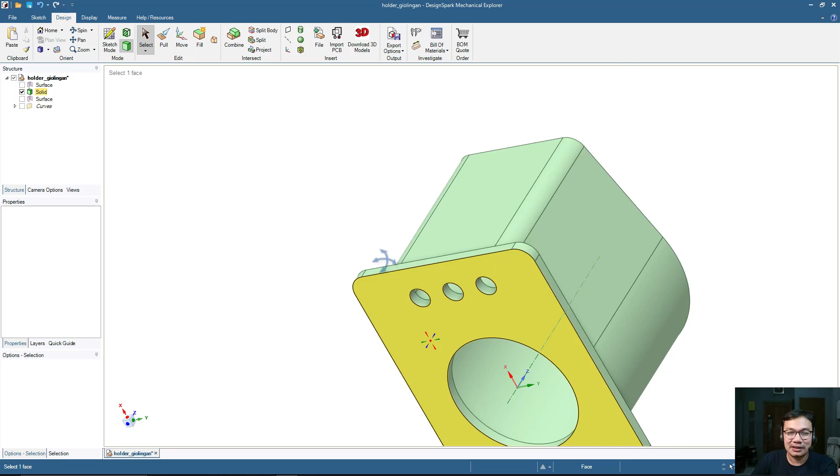On the screen now is the design on DesignSpark Mechanical. It looks like this - it has these walls, and this round one is for the grinder, and this one is for the handle. It has holes on the base so that coffee ground or dust won't get stuck on the holder; it will easily fall off.

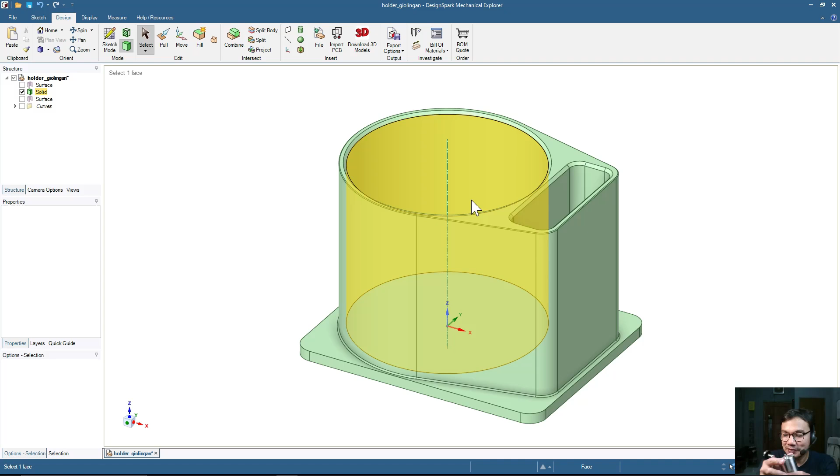Now let me show you how to design this one. It will be based on my grinder, but if you have something with a different size, you can adjust by yourself. Let me start by File, New, Design.

Let's start with the cylinder for the holder of the main part of the grinder. For this one, the diameter is 48 millimeters. Let me start by making a circle here.

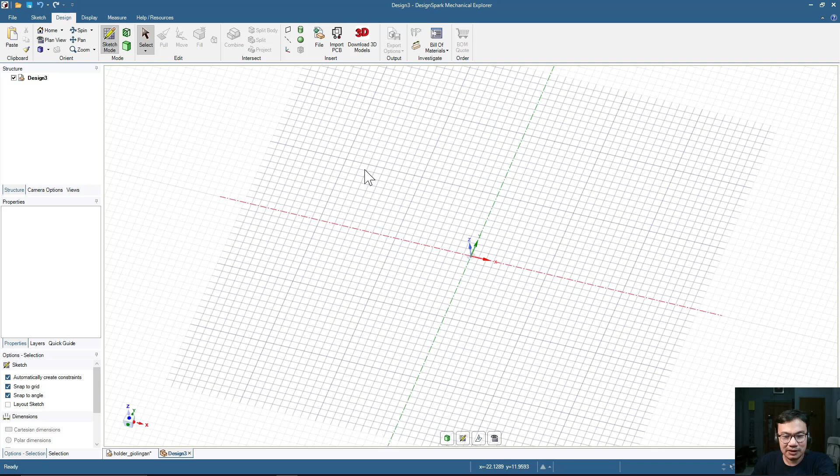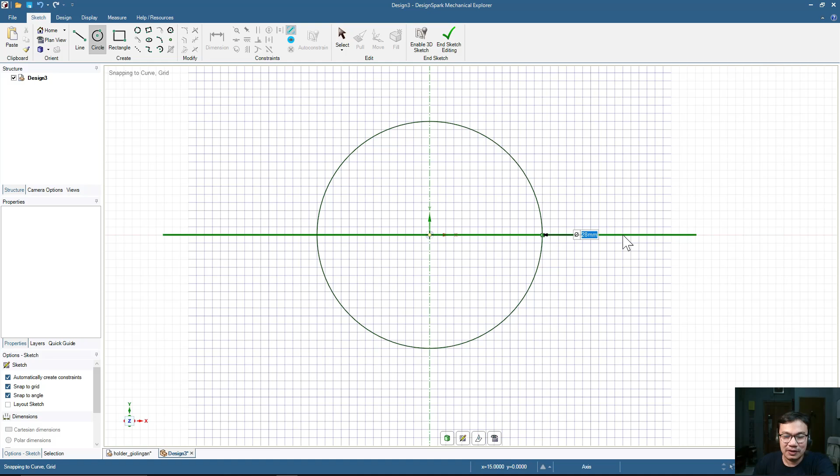I press V on the keyboard to get this top view. I'm scrolling with my mouse to zoom in and out. Sketch, now circle - let me click at the center and move to get 48 millimeters. I type in 48 and press enter, so now we have this circle with a 48 millimeter diameter.

I click the right button on my mouse to move the view, but maybe some computers have different settings for the button position, so what I say here may not be exactly the same on your computer.

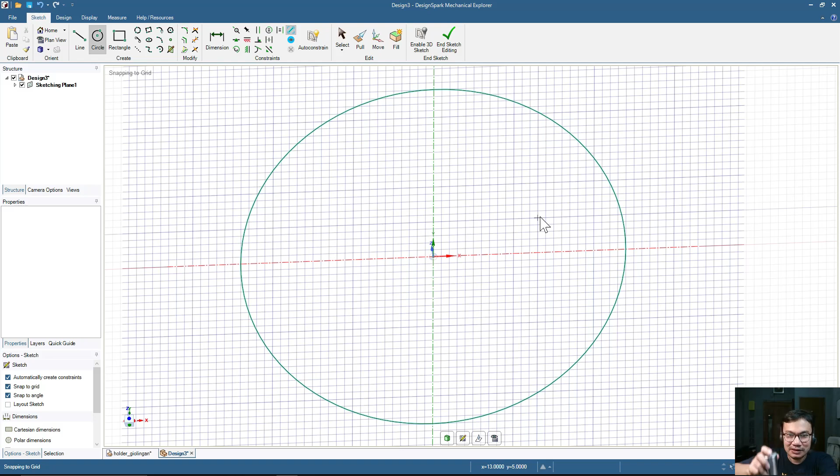This is similar to the diameter of the grinder, but we need to give some space on the left and right so it will easily enter the holder or stand. So let me give 3 millimeters as the space.

To do that, we click the offset curve, then click this circle and move out by 3 millimeters. I type in 3 and press enter.

Next, let me also add a wall, using the same offset curve tool. I click here and type in 2 millimeters so we have thickness for the wall.

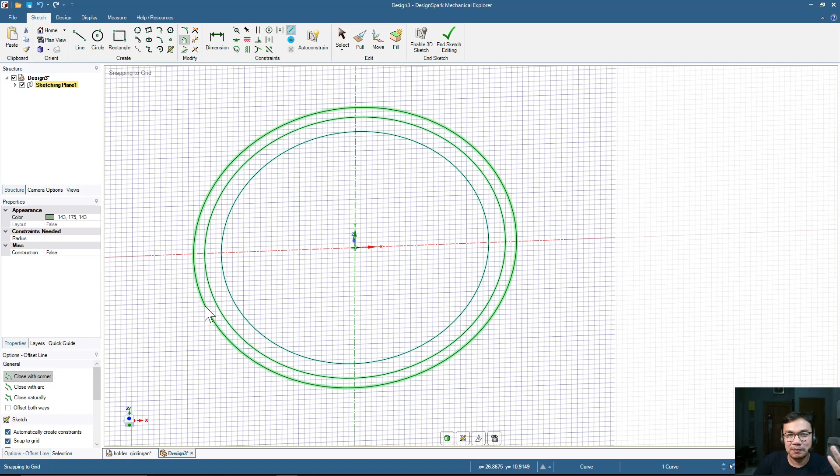Now we will make a shape for the holder, this one. The dimension for this one is 36 millimeters wide and 12 millimeters thick.

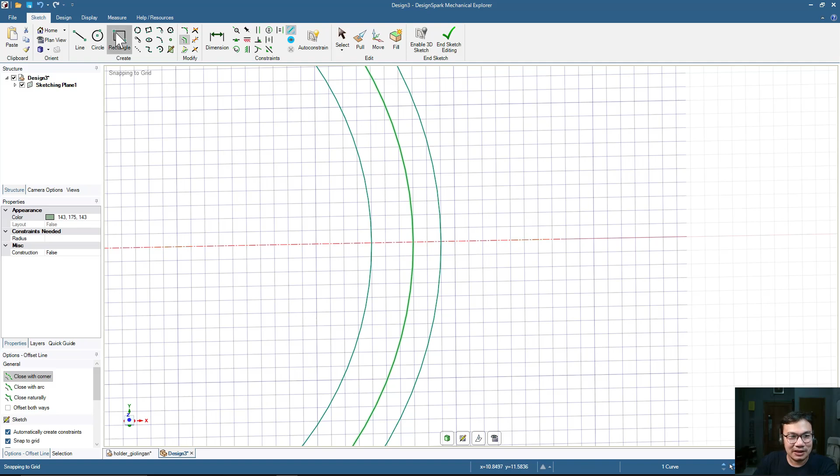So it's going to start right here. Let's say I want to give 2 millimeter space from this circle - 1, 2 from this one. Let me click the rectangle, and from this one I will make a rectangle, 36 by 12.

Meaning now I will make something 18 by 12 - this one, 12 for the wide, and then I press tab on my keyboard and type in 18. Now we have half of the shape that I need.

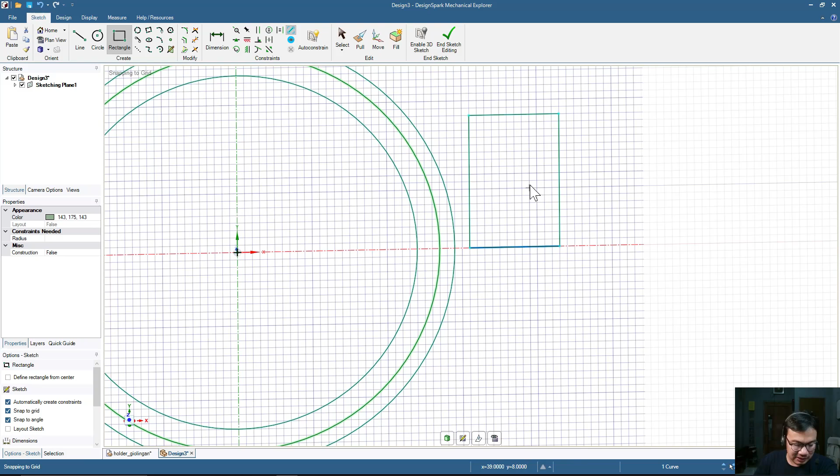And then again another rectangle here, 12 by 18. Now we have this shape - this is going to be the position for the holder.

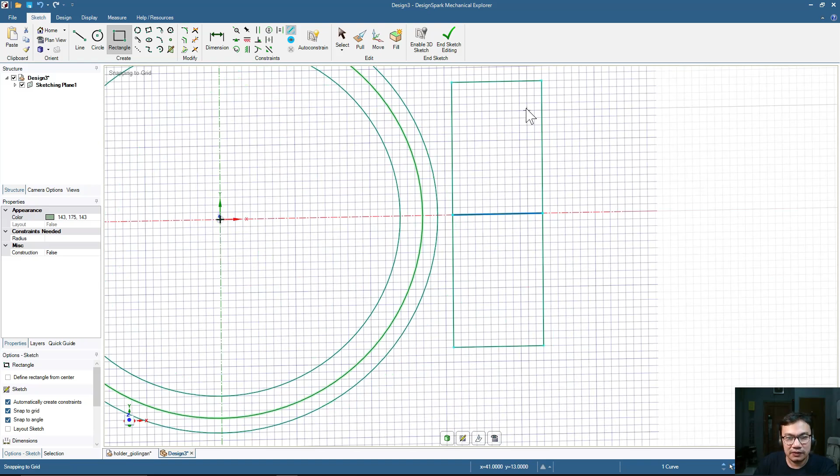Now let me continue by making a wall for the place, the holder for the coffee grinder handle. To do that, I'm using the offset curve again - oh sorry, it was stuck with the rectangle, so I press the escape button.

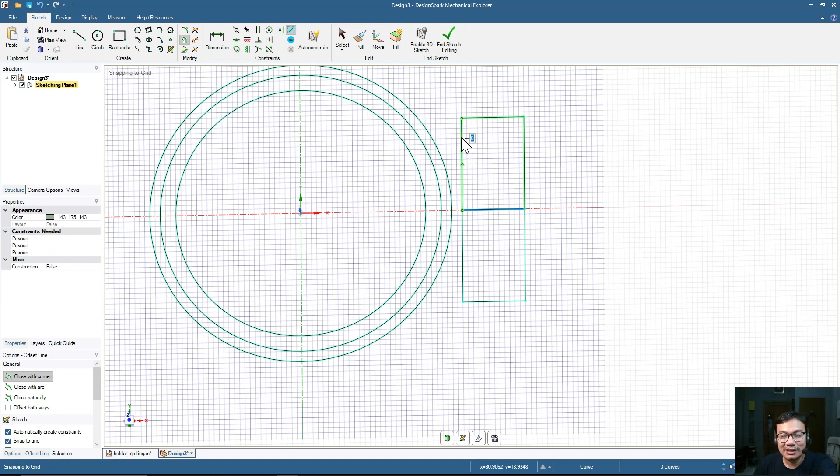Now let me click this rectangle, double click, and move outward, then input 2 millimeters to become the thickness of the wall. For the other rectangle, also the same thing - double click and move by 2 millimeters. Done - this is the basic shape that we need.

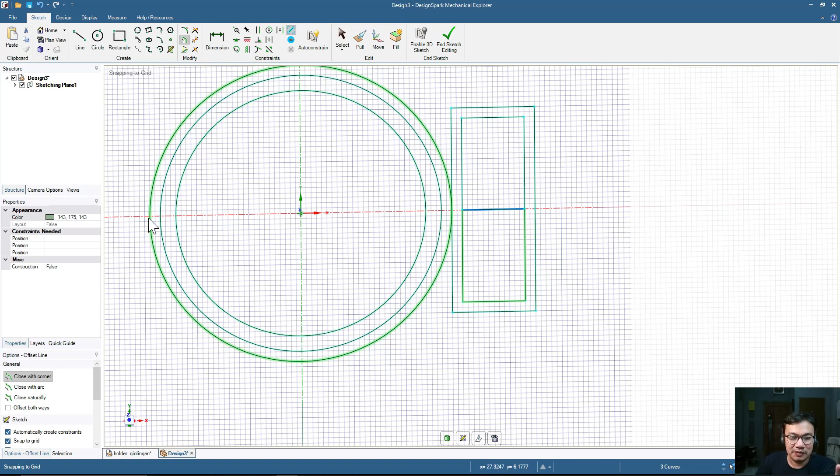Now let's connect the outer line for this one and this one for the main part. There are several methods, but I'm going to use connecting the circle - just follow me step by step. Maybe you have a different method, it's okay.

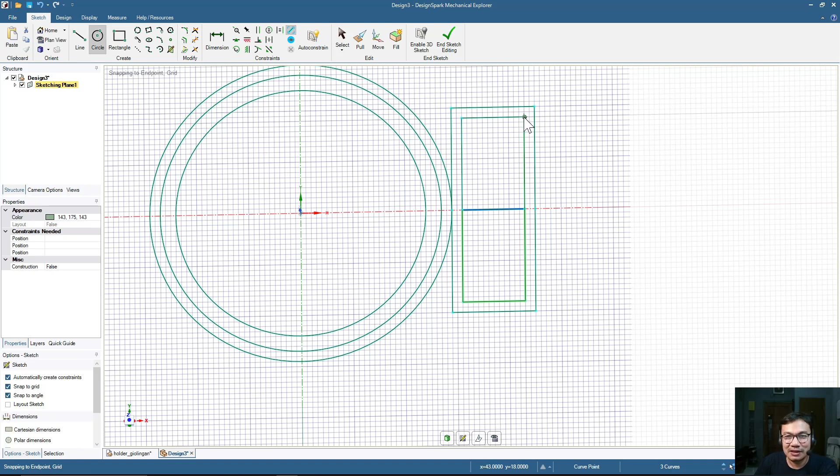I'm using the circle here, clicking from the corner of this one, and moving outside, so I will have this circle here. Then also the same thing here, making a circle with 4mm diameter.

Now we will make a line connecting this bigger circle to these small circles, using the tangent line tool. Let's start with this one at the bottom.

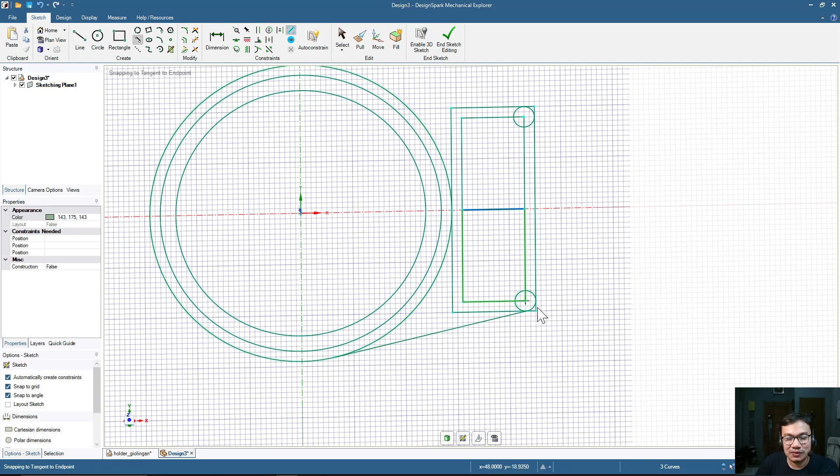So click here and then click on this small circle, and it will connect these two circles. Same thing also for this one - click this one here and this one right here. And we get this shape now.

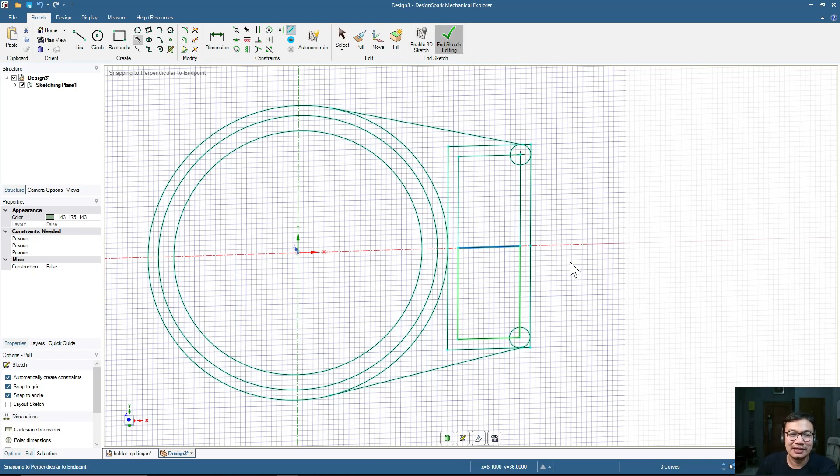To finalize the basic design, let's click this one, end sketch editing, and we can start pulling or extruding the shape. Now let me start by extruding this one, the main part of the holder.

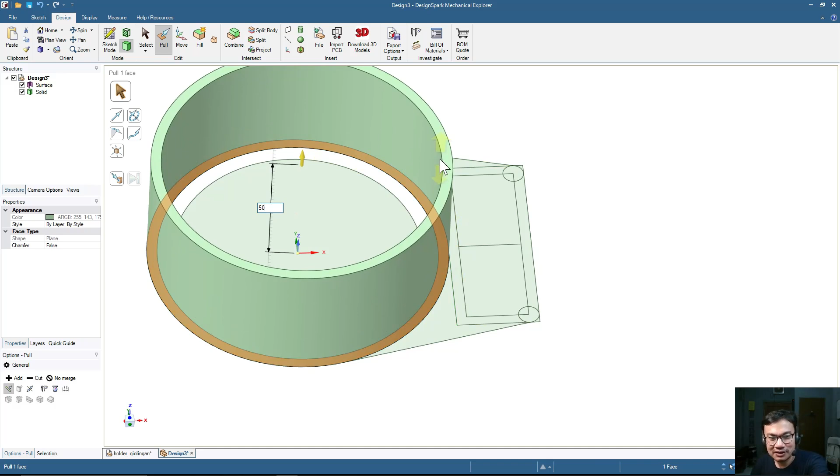And yes, from this I click this surface and move up to extrude by 50mm. Like this. Next is the shape that will be the holder for the handle. So I click here, press Ctrl on my keyboard, and also click this one and this one. Then we can pull and type in 50, or use this one, up to.

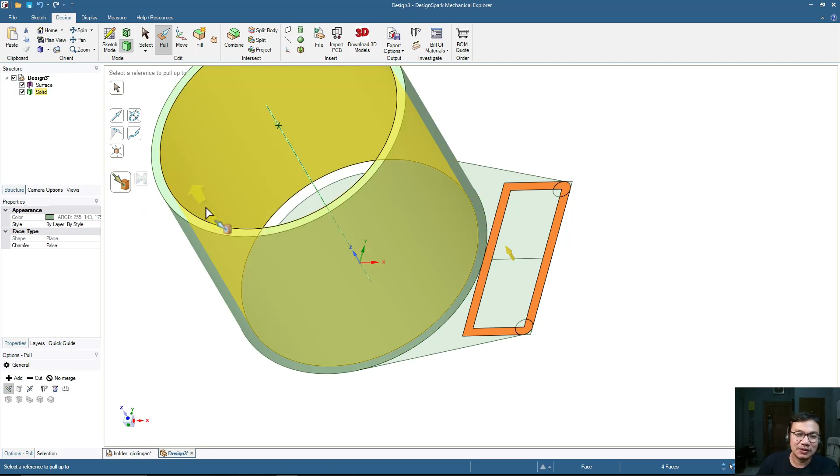Or you can press the U button on your keyboard, it's much faster. Then click here on the surface that you want, let's say the target surface. So I click here, and yes, it will pull or extrude to the same position.

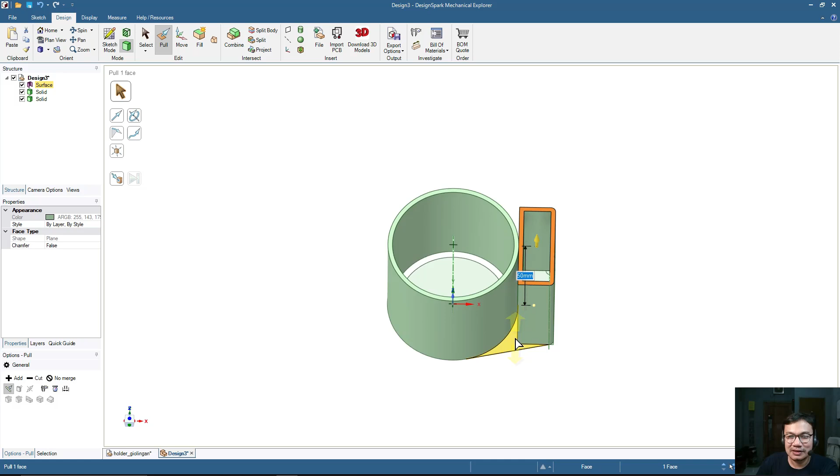Now I will also add some thickness here. So I'm selecting this one, press U on my keyboard, and then click here. Same thing here, click here, press U button, and then click here. And yes, we have this basic shape done.

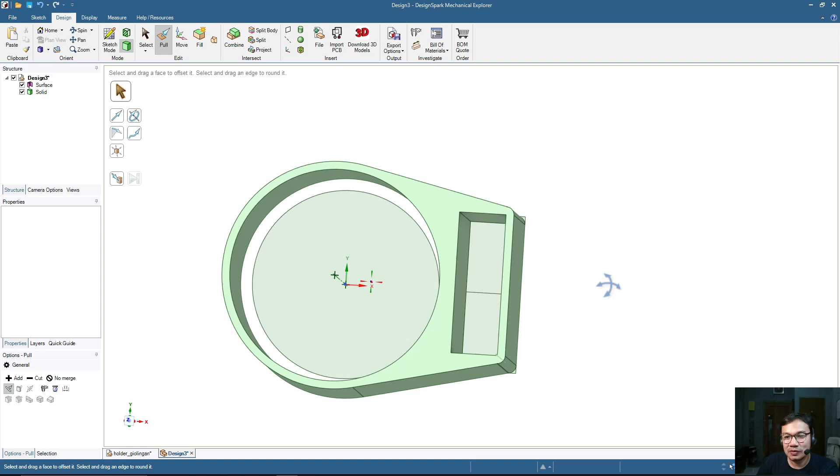Now to make the design better or smoother, I will add radius here. So this one, let's say 2mm. Also the same thing for the other corners. Press home at the menu, and yes, this is how it looks like.

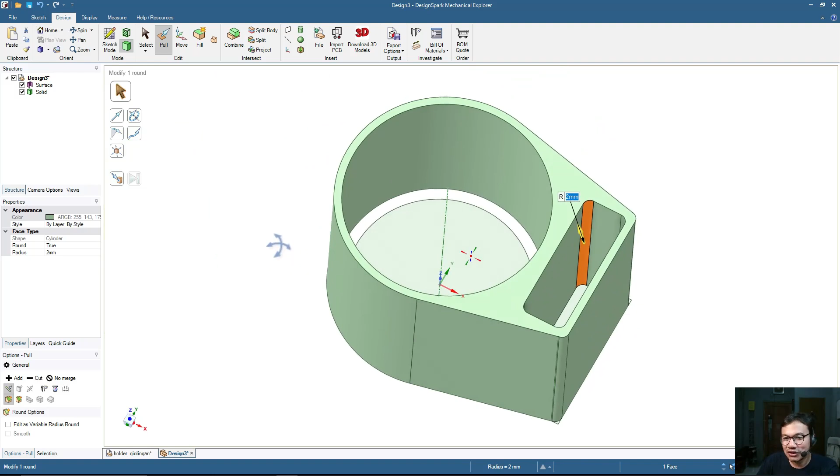Almost finished. Next, let's add the base. To do that I click at this lower surface and then sketch mode, then press V on my keyboard. So we have this bottom view, and we can add any shape we want, but in this case I will add a rectangle here from this position, and this is 3mm from this one.

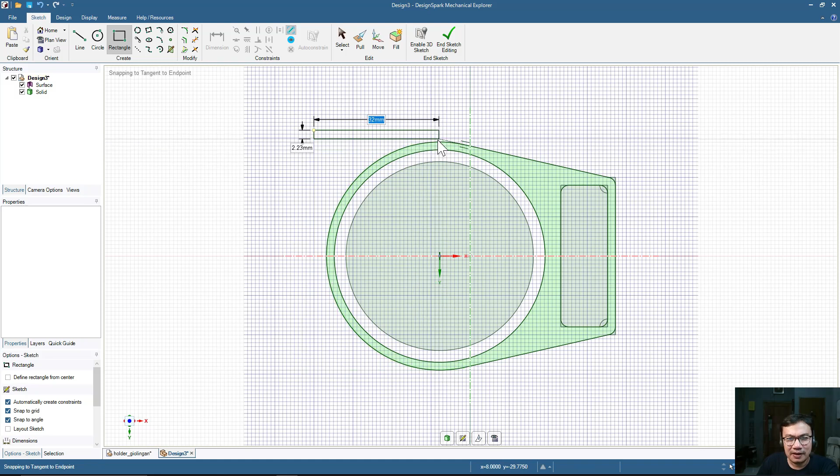Meaning that I can add another 3mm from this one. Like this, so 64. Like this. And then press this one, end sketch editing.

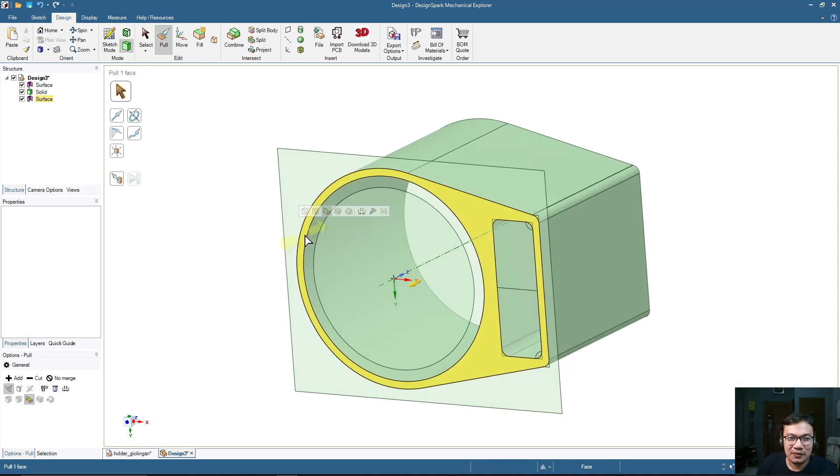Now we can add some thickness for the base, let's say 3mm. So I press Ctrl on my keyboard and click all these surfaces, then pull or extrude by 3mm. Okay, and then click home.

Sorry, my kid is calling, so wait a moment, my kid is calling.

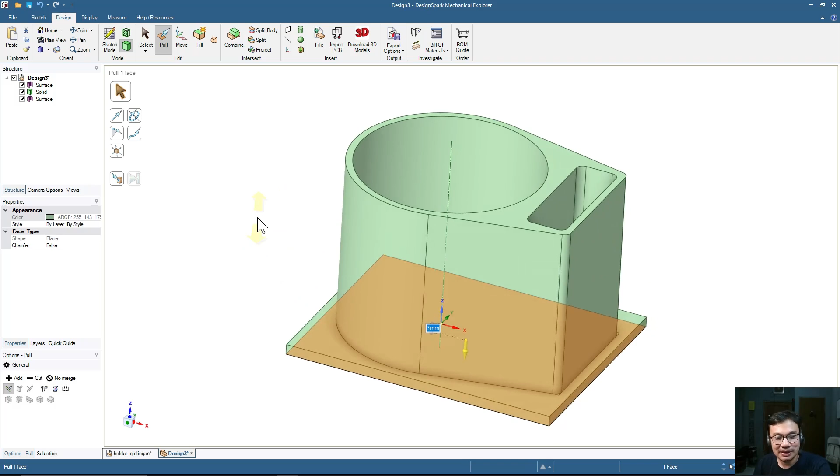Okay, now this one is still in pull mode, so I press escape button on my keyboard, and it's almost finished. Now just some finishing touch. Let me click on this corner and add radius by, let's say, 6mm.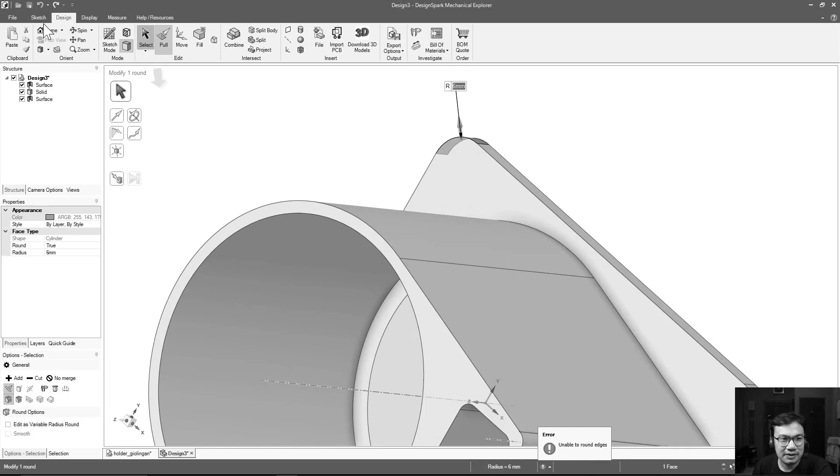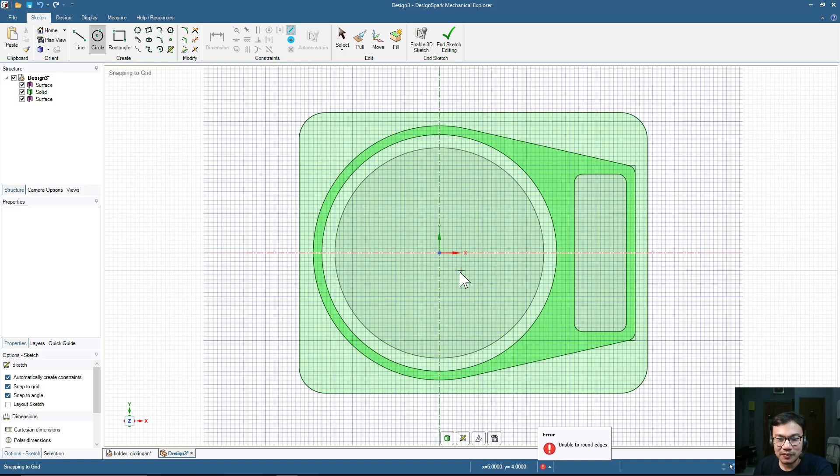Let's add another feature for this design, the holes at the base. So I click here, press K on my keyboard, then V. Now let's add a hole here. To do that, I click this one, circle, or press the C button on the keyboard, then click here and add, let's say, 34 millimeters.

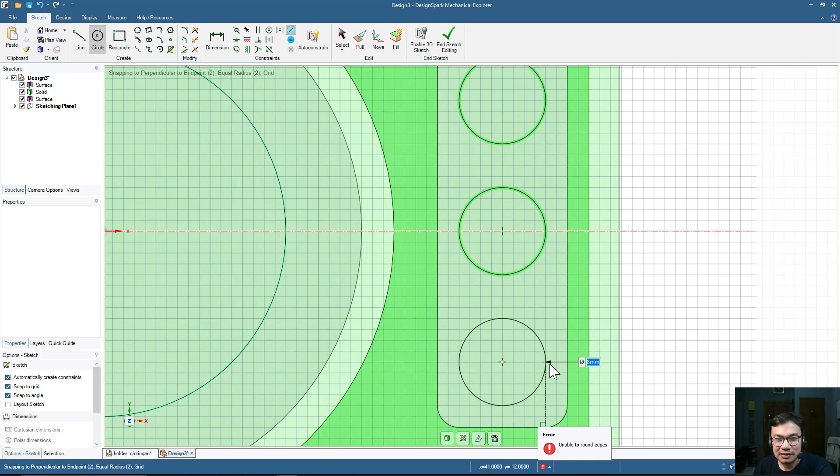And then for this one, let's add small holes right here, let's say 8 millimeters each. This one doesn't have to be very precise, just some size that makes sense.

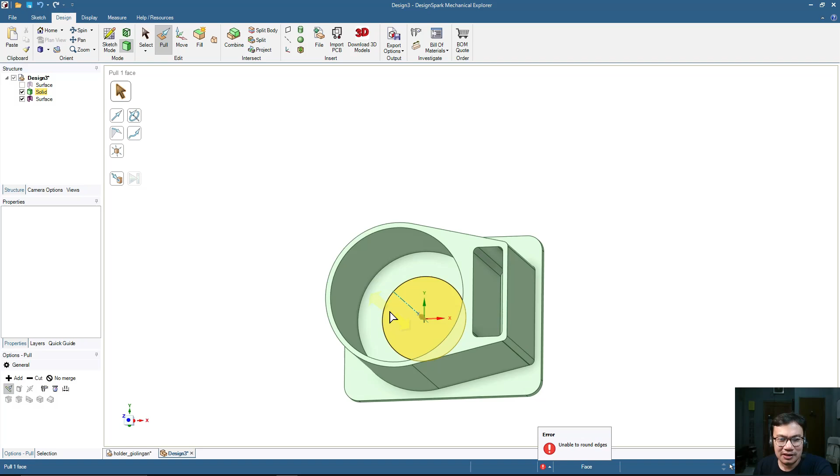Okay, press this one, end sketch editing. Now we will pull extrude this one. Oh sorry, there's another surface here, wait. Let me hide this one so we can access this surface. Click here and then pull extrude cut, something like this.

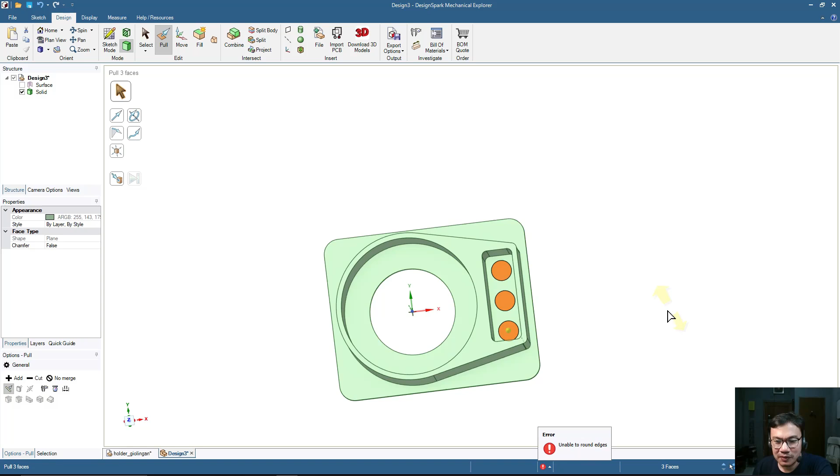Also the same thing for these 3 circles, so let's wait. This surface is covering that one, so let me press delete. Let's try that one. Click this 1, 2, 3. You can do one by one, or press Ctrl and select all of them and cut like this. Now we have an almost finished product, and let me add some chamfer or radius to increase the strength and also the smoothness.

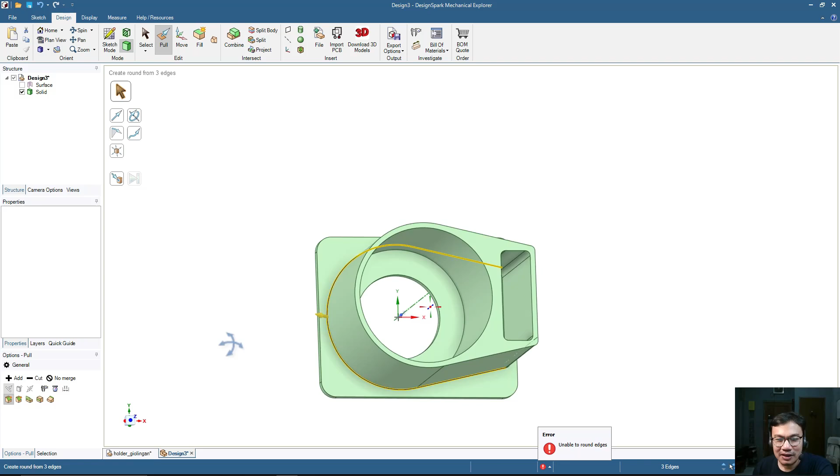So for this one, let me double click and add chamfer, let's say 0.4. Then for this one, the inner circle, let me add something like 2 millimeters. And then for this one, double click and let's say also 2 millimeters.

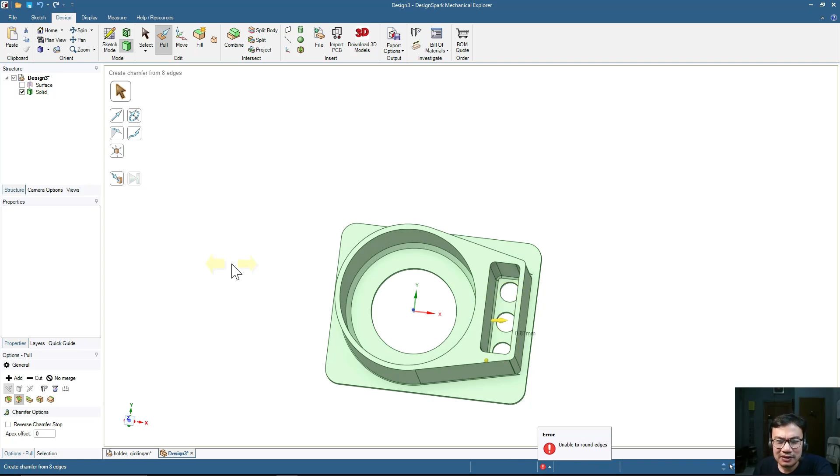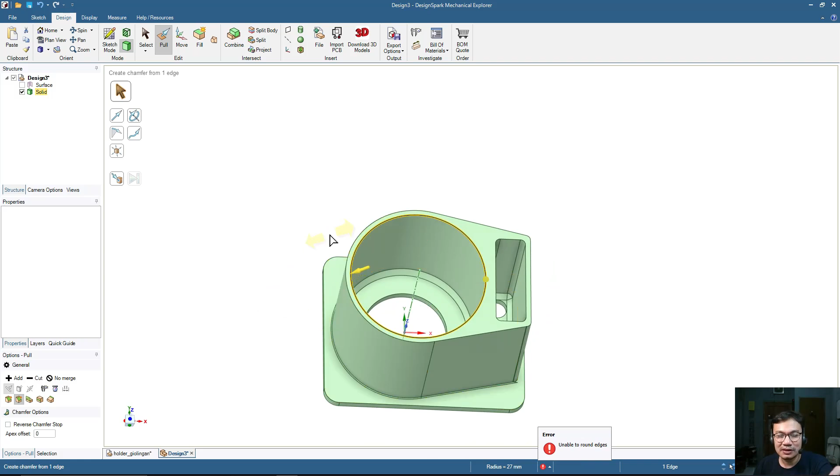And then for this one, we will need some chamfer, but not too big, because we've added 3 millimeters on each side, meaning additional 6 millimeters diameter. But if your design is a bit tight, you will need a larger chamfer to help guide the cylinder entering the holder. So this one, let me just use 0.6.

I don't know what happened, but my computer is slowing down now.

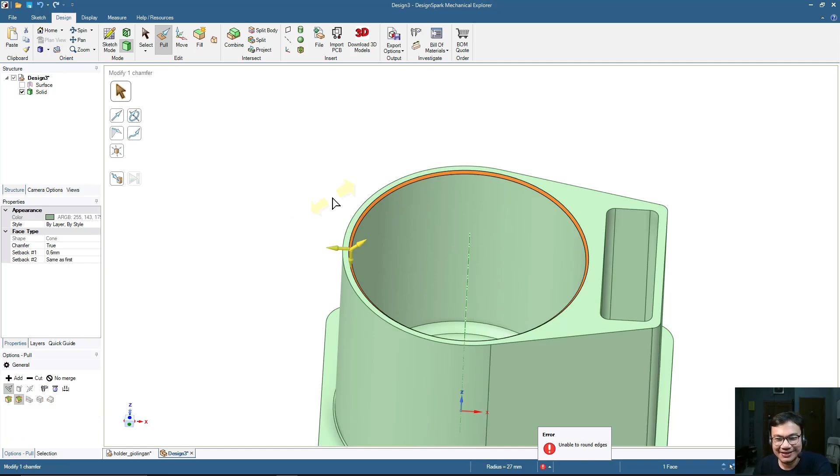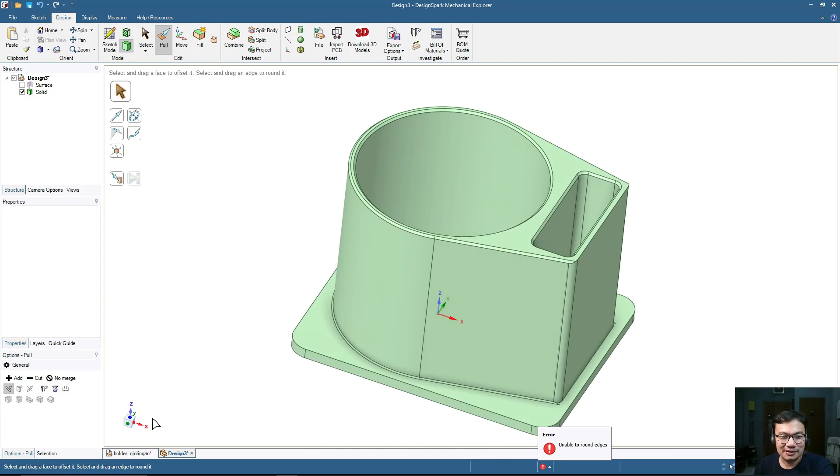Something like this, and also this one here and this outer one. Okay, and yes, done. This is the result of the design, similar with this one, not exactly the same, but similar.

And that's all for this video. You can then export to become an STL file and print using your 3D printer. Before that, of course, you will need to slice in your favorite slicer.